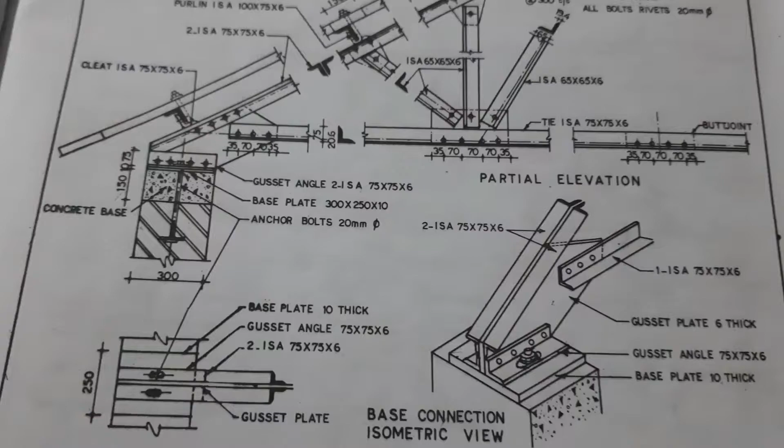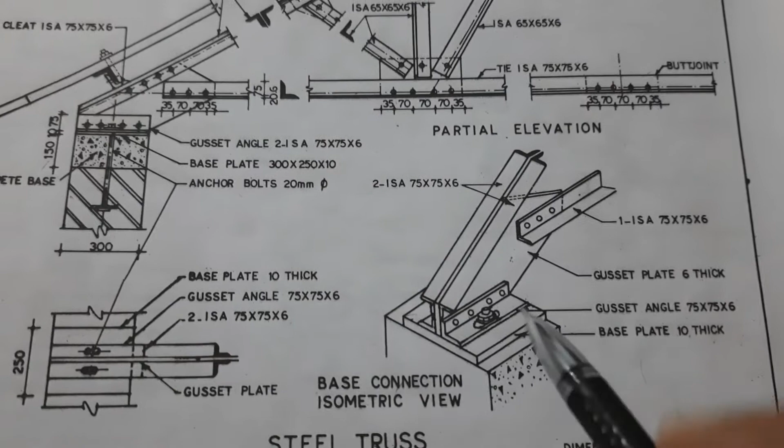Here let's see the isometric view of this part of this truss. It is the isometric view and it is the plan view of this part. Now if you look at this isometric view from top to bottom, then you can see this figure. Here let's see what are the meaning of different lines here. You know, it is the concrete block and it is represented by this rectangle in this figure.

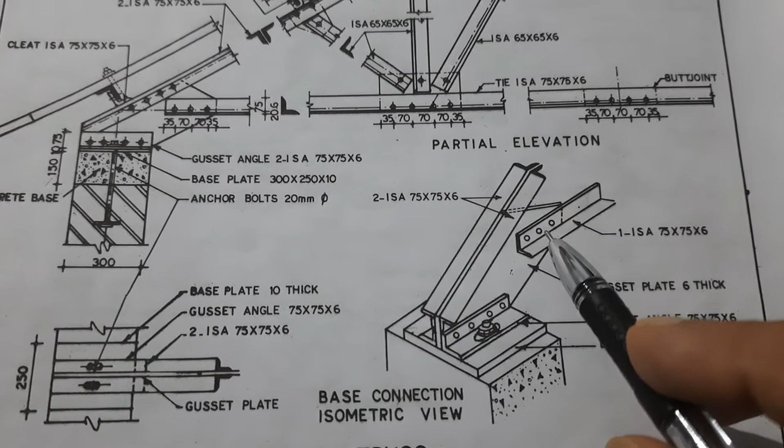Now this is the gusset plate. This plate connects two of these angles and this angle here is the same angle and these two angles are these two angles. Here one angle is at the opposite side of this angle and it is not visible since you are looking from this side. Okay, now these are the two angles which is represented by this.

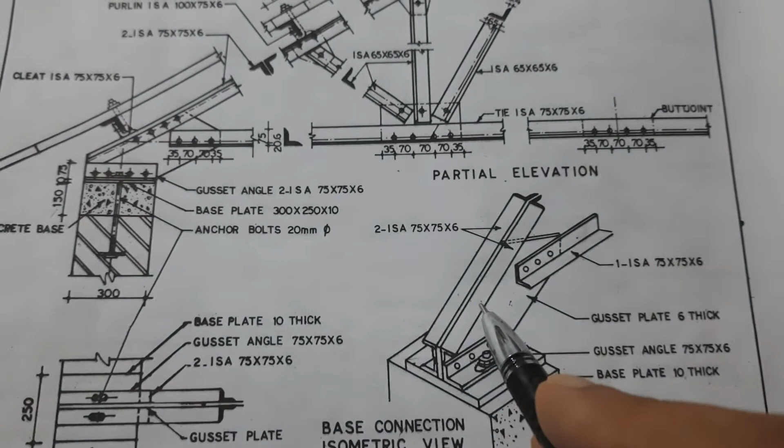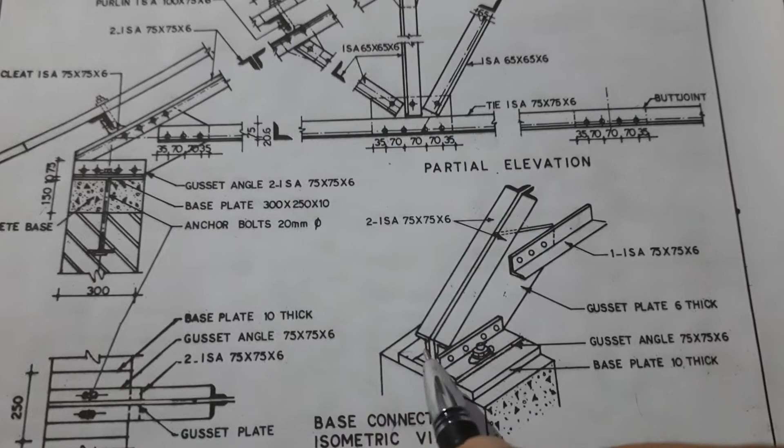Now this is the gusset plate. It is nothing other than this plate. Now these bolts are represented here and here you can see these bolts. Now let's compare these two figures. This is the top view of this isometric view and here you can see these two angles.

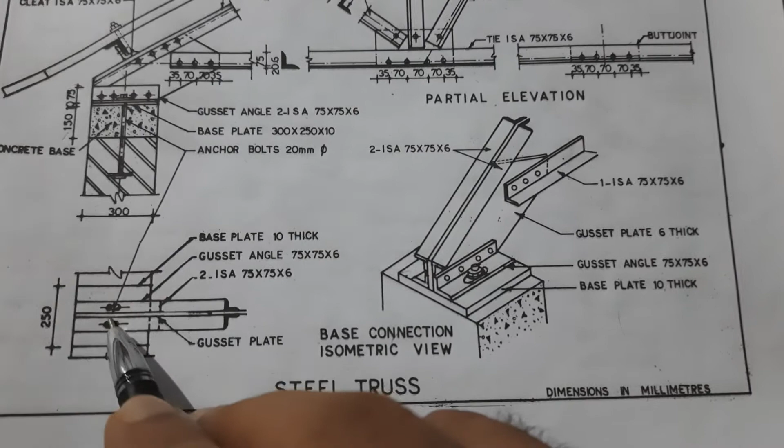These are the two angles and this edge, it is the edge of the base plate. It is represented by this line and this bolt is shown here and you can see one more bolt, it will be here and this is the length of this side, 250 millimeter.

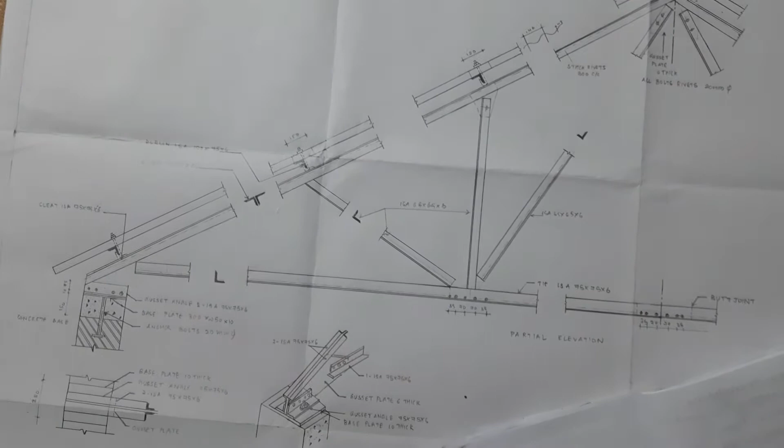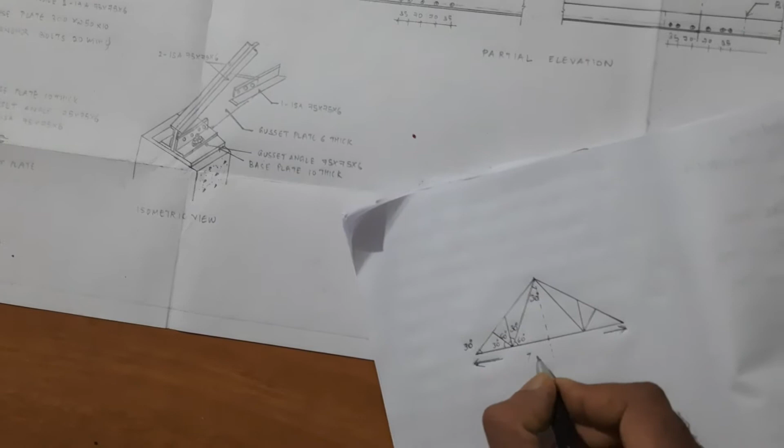Here this is how you should plan your drawing sheet. Let me tell you the step-by-step procedure by which you can draw this entire figure. So for this purpose, first of all, you should draw a single line sketch of the entire roof truss. Here it is given that the span of the truss, that means support to support distance of the truss, is 7.5 meter. That means 7,500 millimeter. So you should start from here.

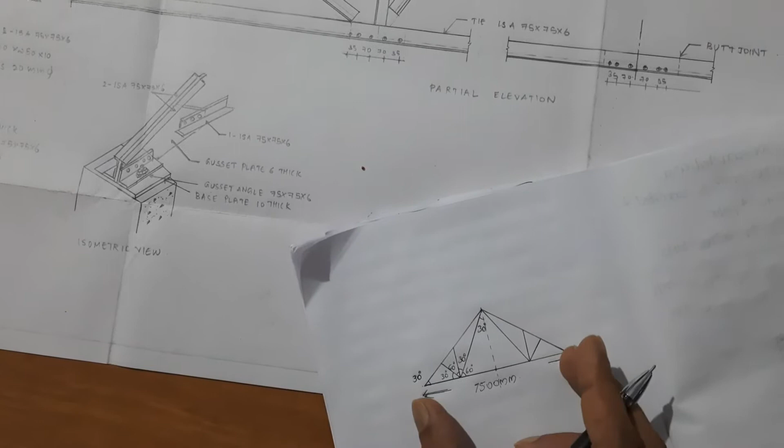You can draw 7,500 millimeter in a particular scale. Here I have taken 7.5 centimeter for this 7,500 millimeter and I have drawn 7.5 centimeter here. After that I should mark all these angles. So here I will tell you the step-by-step procedure of drawing all these remaining lines.

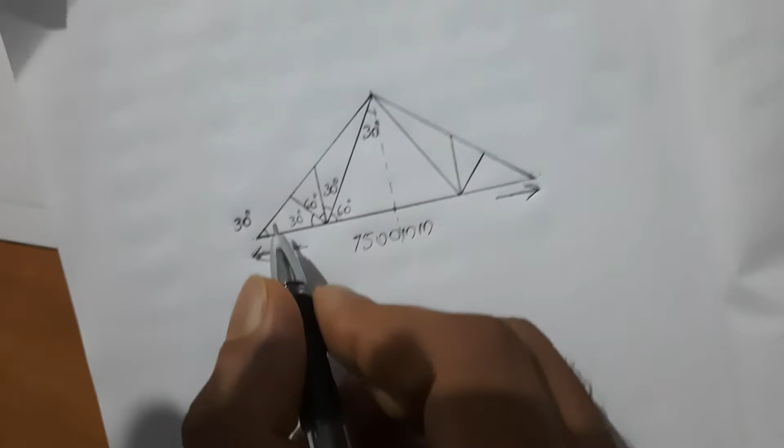So for this purpose, first of all you should draw a 30-degree line from this corner and this corner so that you will get these two lines and these two lines will meet at this point. So you are getting this point also. Now after that you should make a perpendicular from this point to this line and from that perpendicular we can take 30-degree angle to draw this line.

So you can draw these two lines and after that you will get these 2 points. Once you get this point, you can draw all the remaining lines by taking all these angles. So in that way you can finish this line sketch. Now based on this line sketch you should draw the entire figure. Now let's see how to draw the entire figure from this line sketch.

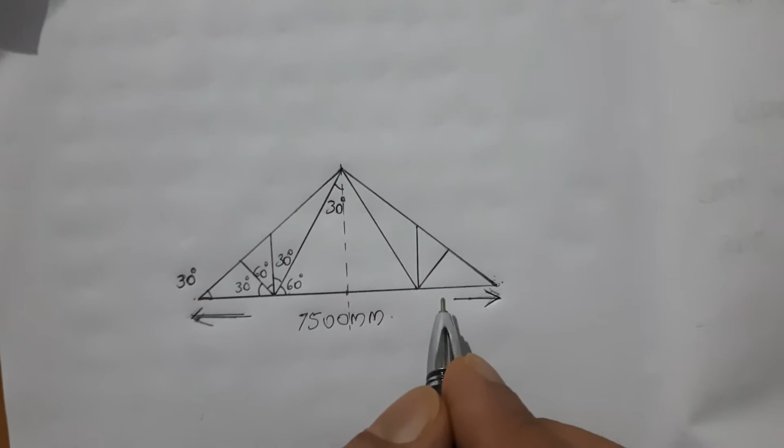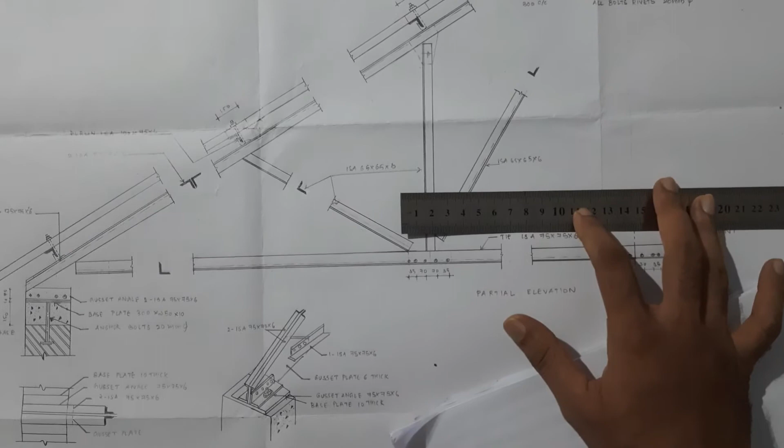So for this purpose we should transfer this line sketch to the entire drawing sheet. Here you know the length available in the drawing sheet that we can measure from the left margin to the right margin. So a useful length of around 50 centimeter you will get in the horizontal direction and around 40 centimeter you will get in the vertical direction. So you should finish the entire figure within this useful space.

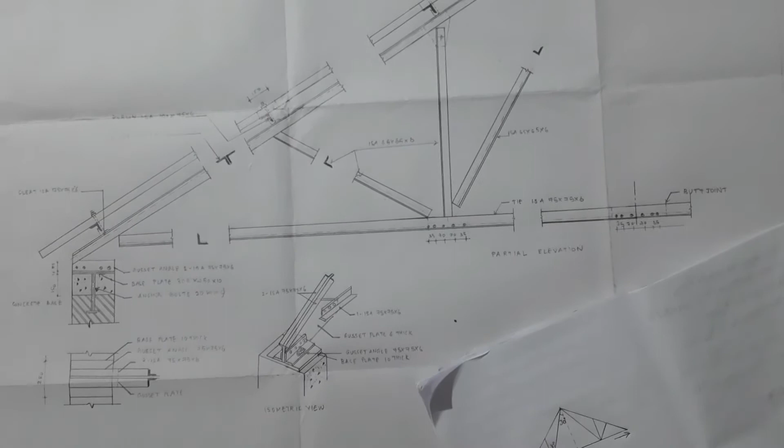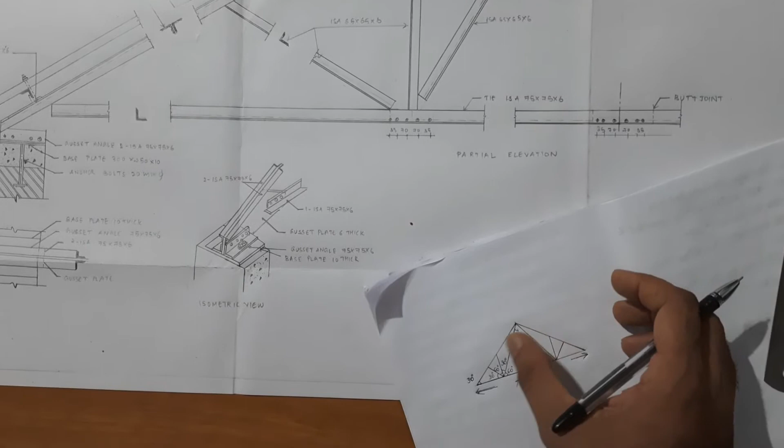So keeping in mind this fact, you should decide a scale. Now let's see how to decide a scale. So for this purpose you need not draw all the parts of this figure, because this figure is symmetric. So once you draw this much, this part can be imagined same as this part. So here what I have done is I have drawn only half of the portion. So you can also draw like this.

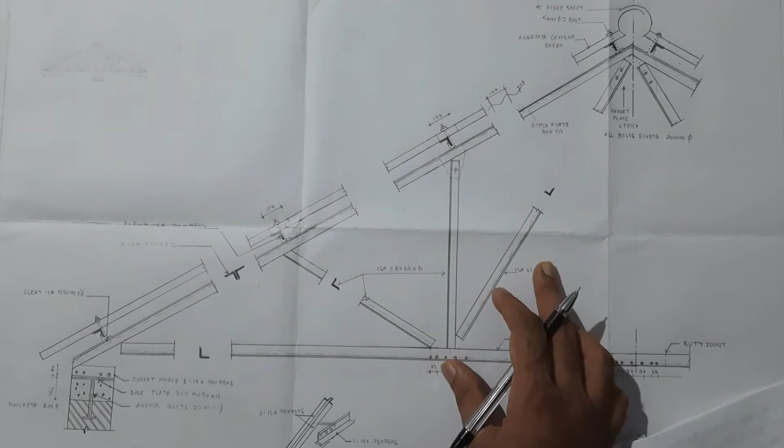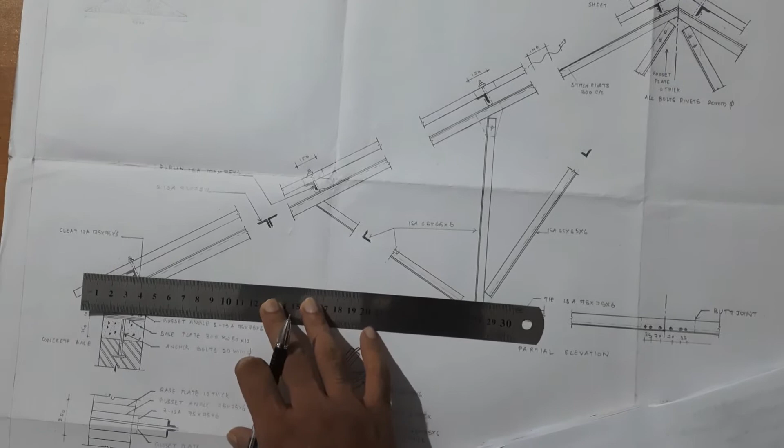So in this way, first you decide whether I can take a 1:10 scale or not. So if you take a 1:10 scale, then you should understand in field you are having a span of 7.5 meter. That means 750 centimeter. So that 750 centimeter you can take in the drawing sheet as how much length? So here I have already told that you need not take the entire length 750 centimeter. You should take only half of this length.

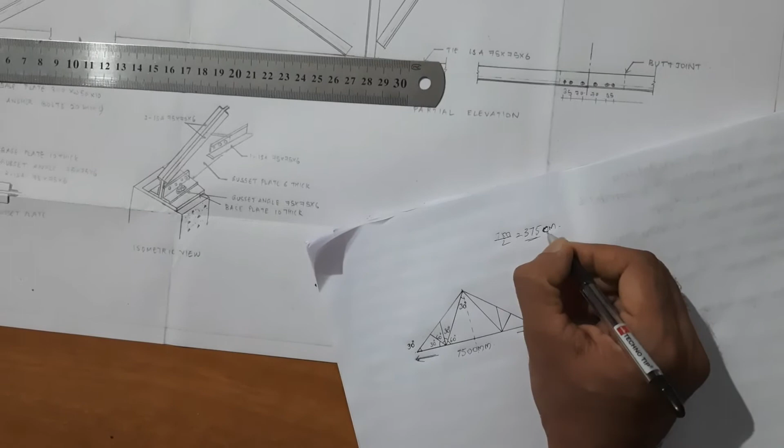So it will come around 750 divided by 2. That means 375 centimeter. Okay, 375 centimeter only you should consider. So simply I can take 37.5 centimeter for this 375 centimeter. So I am getting 375 divided by 37.5.

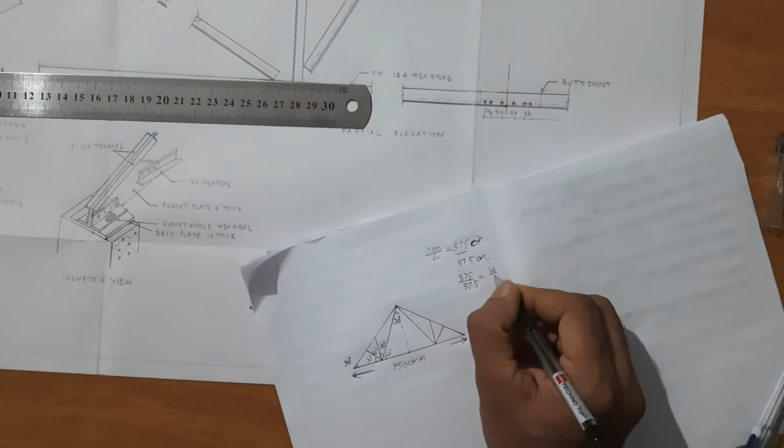That is equal to 10 divided by 1. So from this I can see that if I take 1 centimeter distance in this figure, then it represents 10 centimeter in the actual truss. So I can simply say that it is a 1:10 scale drawing.

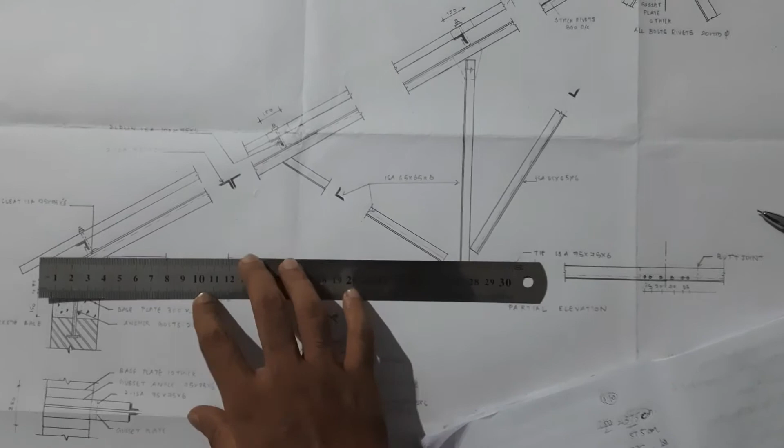So if you take a 1:10 scale drawing, then you should be capable of taking 37.5 centimeter in the horizontal direction. Now you simply check whether that much length is available or not. So here I can take it using my scale. Up to here I can take 30, and up to here it will be 35 centimeters. So definitely I can take 37.5 centimeter in the horizontal direction. So I can fix the scale as 1:10. So in that way I decided the scale as 1:10.

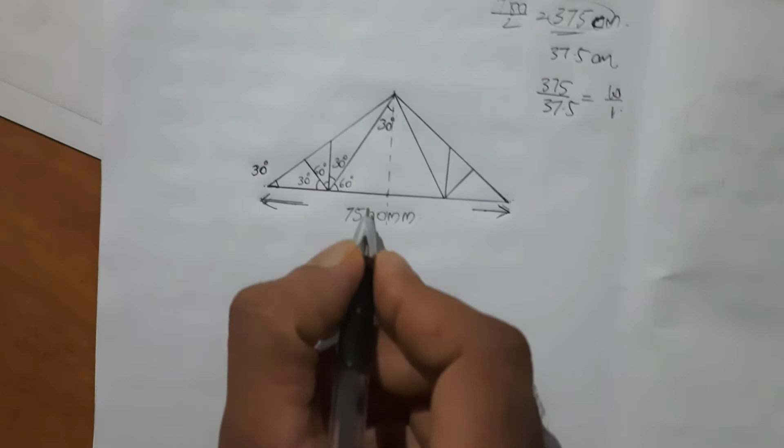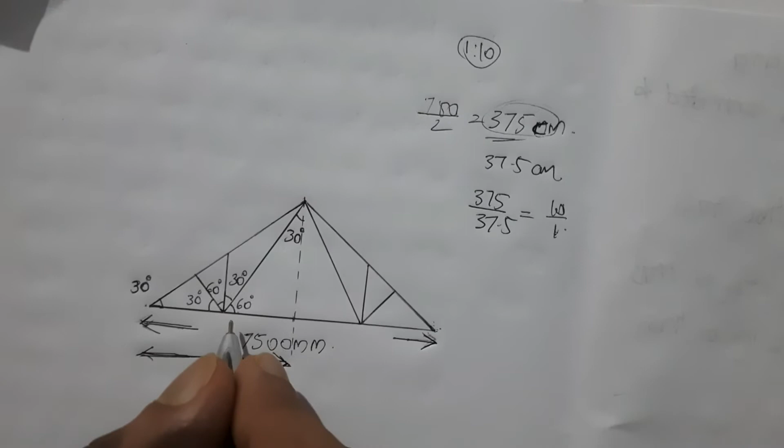Then I should start drawing. So for this purpose I should make all the dimensions in this figure, in this line sketch. Here I have drawn 375 centimeter or 3750 millimeter. This much length I will get as 3750 millimeter, and further I should mark the remaining lengths. So without marking all these lengths also I can draw this figure. That step I have already discussed with you during the starting of this discussion. So in this way you can enlarge this line sketch to this much area.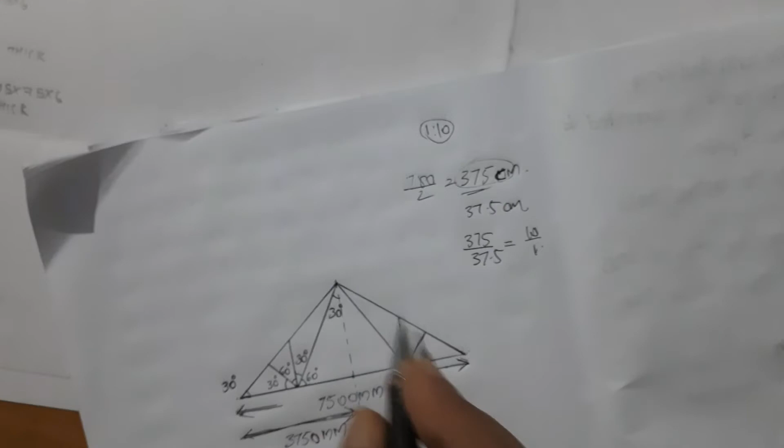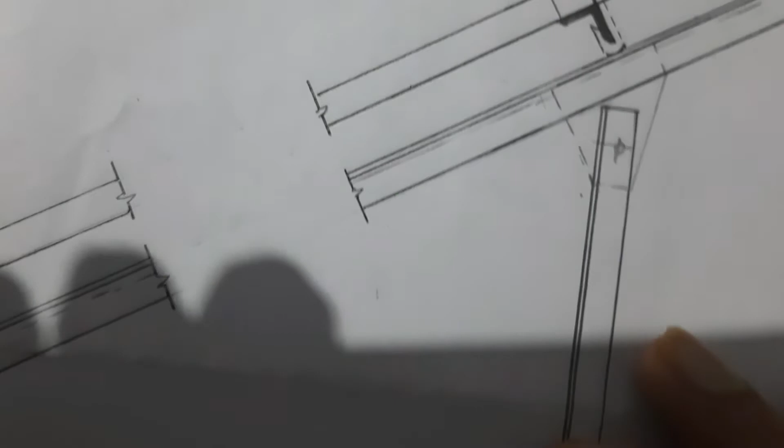So first what you should do is you should make a line sketch in the enlarged dimension here. So that line sketch will pass through the center of this angle section, that you can see if you observe carefully. Here I have drawn that line, and after drawing all this figure I have erased that line. So that line is not visible here. So here I have made a line sketch using a light pencil. That means a pencil that can be erased very easily. So with that pencil I can draw the line sketch first.

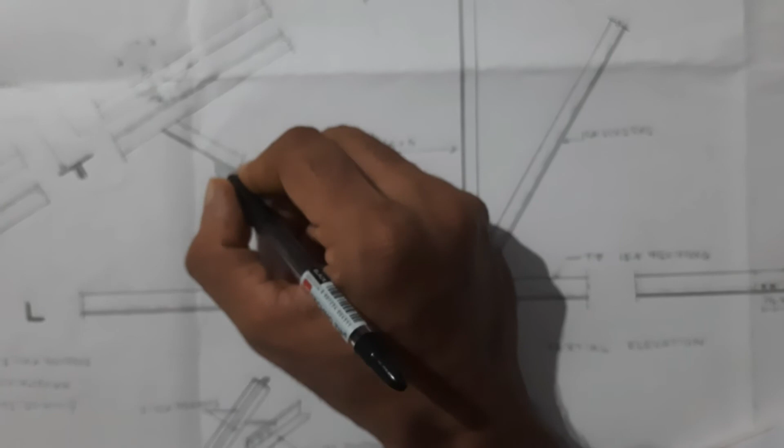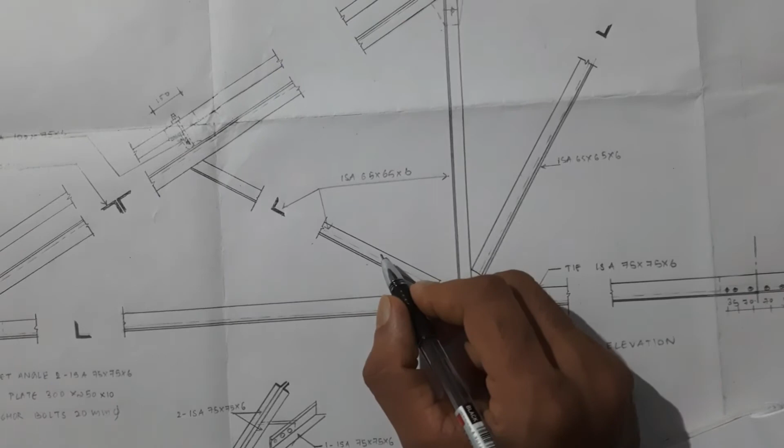After that I can take this double line. That means I can take the length at the two sides of this single line, and I can make it a double line like this. So at all these remaining lines I can take this single line into a double line. So this double line represents the width of a steel section. It is an angle section. So I have already discussed about the angle sections. Now you can draw the entire figure in a double line.

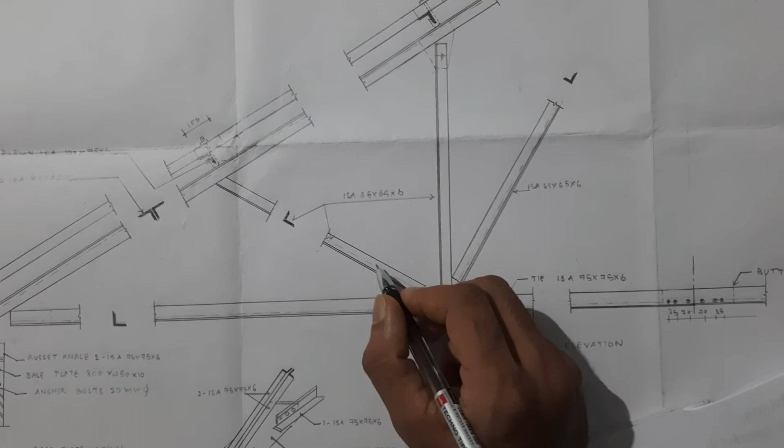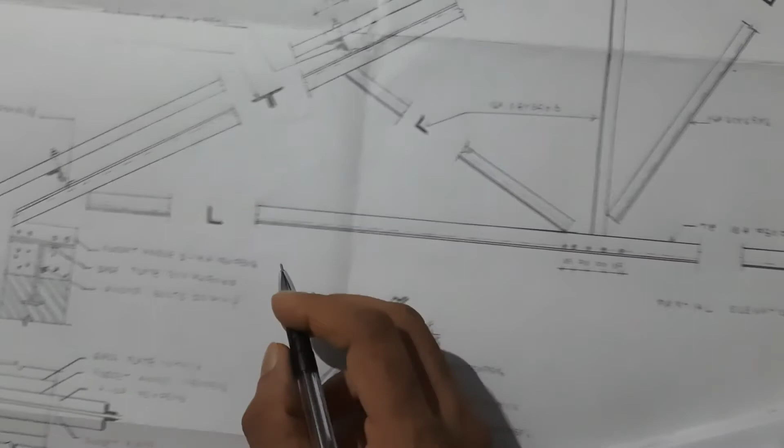And after drawing this double line, you should erase away the first construction line that I have drawn for the line sketch purpose. So after erasing this, definitely the double line will also get erased. So you should once again draw the double lines. In that way, you should draw the entire double line figure. So after drawing this double line figure, you should add the remaining portions, just like the asbestos portion, then the bolt, the gusset bases, and the gusset plates, then the ridge, and the bolts. After that, you should draw the concrete base also.

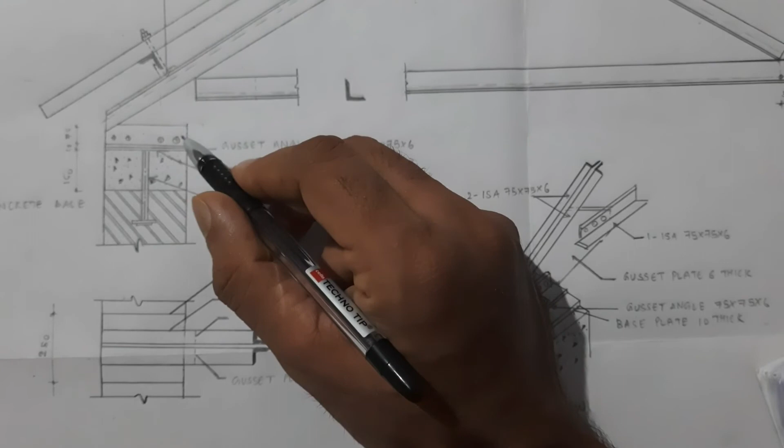Here, in this concrete base, it is getting sectioned in the vertical plane. So here you can see it is a masonry, it is a bolt which passes through the concrete. Concrete is here, and here you can see a base plate which is connected by different bolts. Now in this way you can draw the enlarged sectional view of the half portion of this truss work. Now half portion only is required, the remaining half can be imagined.

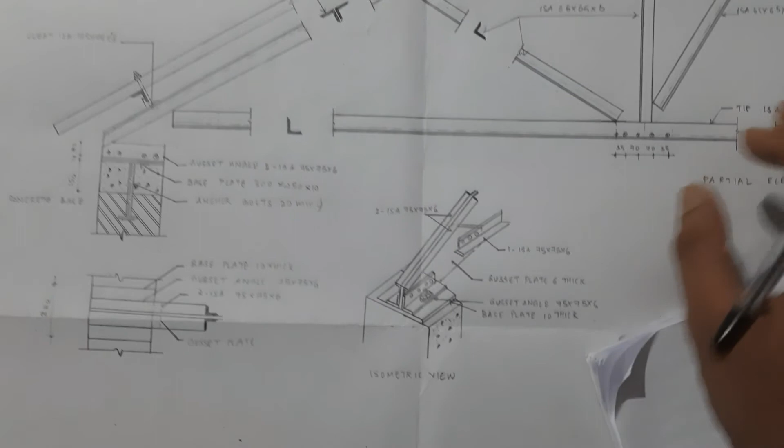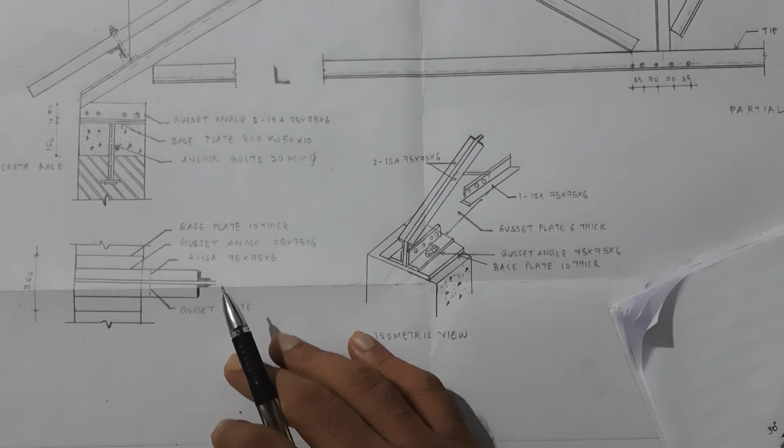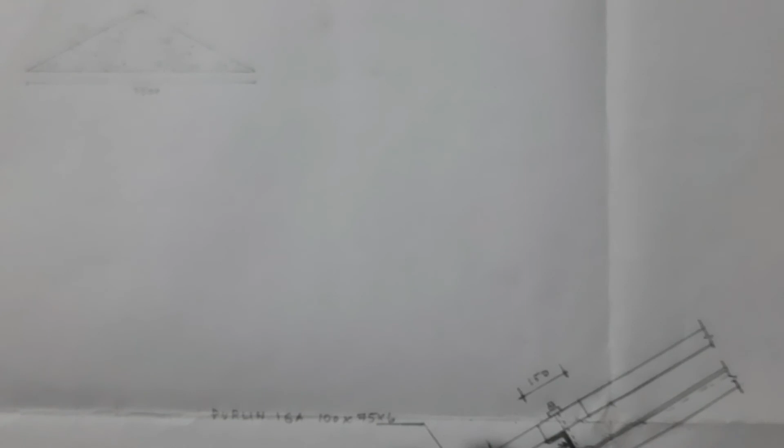So in that way you can draw that, and after that you should draw the enlarged view of the corner part. So that part is drawn here, and I have discussed already about the isometric view. So in that way you can adjust this isometric view in the bottom portion. So you should consider in mind the space required for this isometric view. After that only you should start drawing this enlarged view, otherwise you will not get space for drawing this isometric view. So first you should draw the line sketch at the top left corner of the drawing sheet. Then only you will understand how to draw the line sketch in the enlarged paper. So in that way you can manage your drawing sheet.